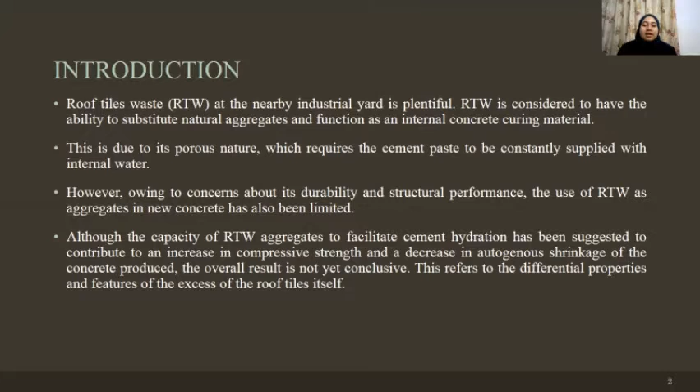Figure 1 shows the crushed roof tile waste that we will use in this analysis. Figure 2 shows sand and gravels, or aggregate, to make cement. Figure 3 shows the structure of cement and concrete.

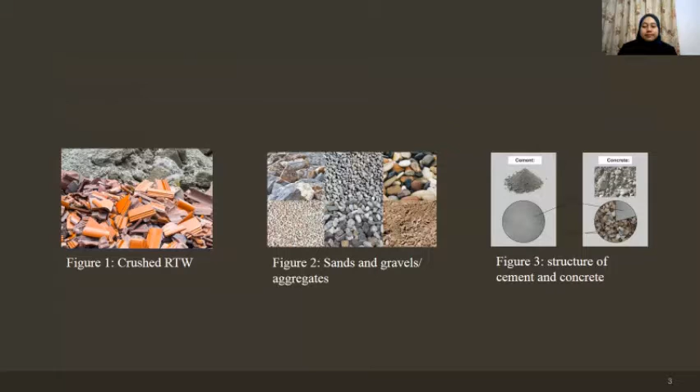Problem statement in this project: the toughness of the cement can be measured based on the replacement of the producing aggregates through waste ceramic. In this research, we need to study how tough the concrete produced is by using the roof tile waste in the analysis of the mechanical properties of green concrete.

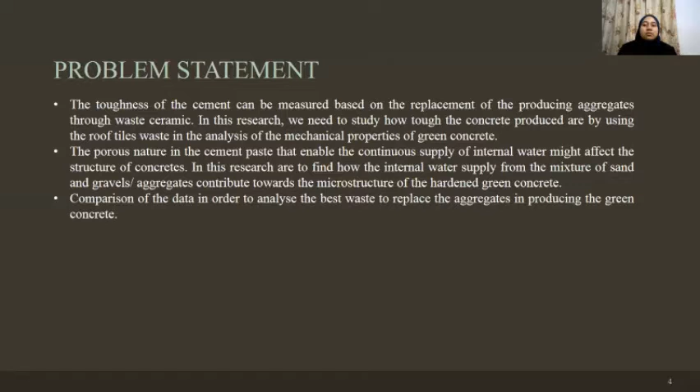The porous nature in the cement paste that enables the continuous supply of internal water might affect the structure of concretes. In this research, we aim to find how the internal water supply from the mixture of sand, gravels, or aggregate contribute towards the microstructure of the hardened green concrete. Lastly, comparison of the data in order to analyze the best waste to replace the aggregates in producing the green concrete.

Objectives in this project are: first, to analyze the characteristic and physical properties of the crushed recycled waste roof tiles as an aggregate for green concrete. Second, to analyze the mechanical and physical properties of green concrete produced using roof tile waste. Third, to characterize the microstructure of green concrete produced using roof tile waste.

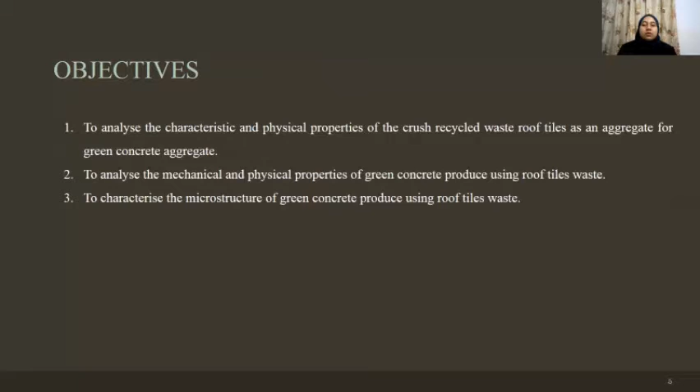The scopes in this project are: to study the characterization and physical properties of the recycled roof tile waste. Second, study the mechanical and physical properties of green concrete produced using roof tile waste. Third, study the microstructure of green concrete produced using roof tile waste.

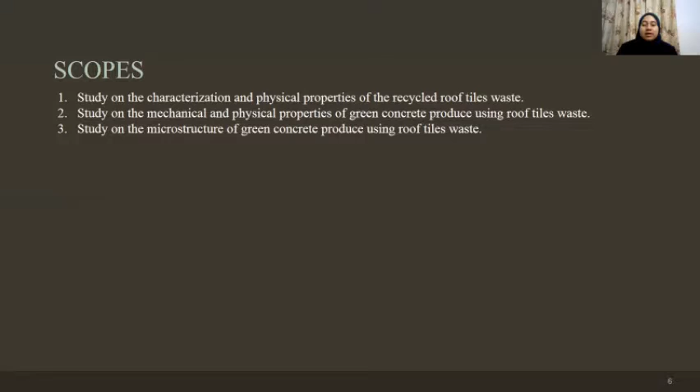Next will be the literature review in this project. I have found 3 articles that are directly related to the objectives in this project. The first article is: release of internal curing water from lightweight aggregates in cement paste investigated by neutron and X-ray tomography.

The parameters in this article are water to cement ratio, which is 0.25. Cement used was Portland cement, CEM 1 42.5, with density of 3,130 kg per meter cube. The Blaine fineness is 2,800 cm squared per gram.

A polycarboxylate-based superplasticizer, with solid content of 30% by mass, was added at a dosage of 0.72% by mass of cement. Deionized water was first boiled for about 15 seconds, then cooled down to ambient temperature before mixing. The mixing was performed in a vacuum mixer, with Twister evolution, for about 2 minutes.

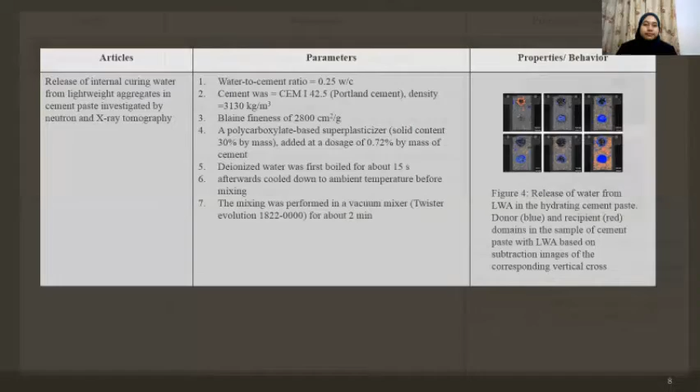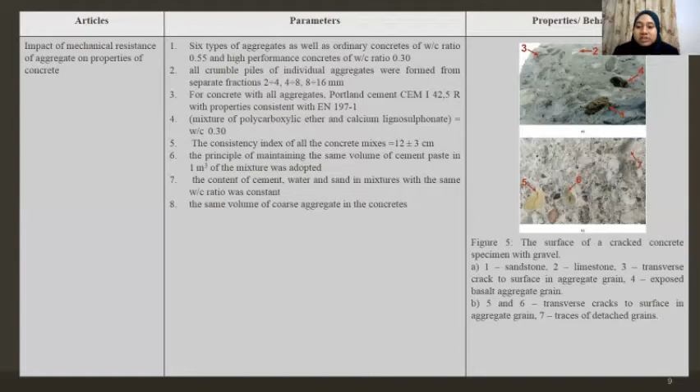In the last article, which is mechanical properties of recycled aggregate concrete under compression shear stress state, the parameters used in these articles are...

The Portland cement used is P.O 42.5, and river sand with a fineness modulus of 2.67, and water cement ratio of 0.43, combined with 3 kinds of RCA replacement rates, which are 0%, 50%, and 100%, and 5 sets of compressive stress ratio, which are 0, 0.2, 0.4, 0.6, and 0.8.

The water dosage consists of 2 parts. One part is normal water, calculated by the common concrete mix method, and the other part is named additional water, determined by the water absorption of recycled coarse aggregate.

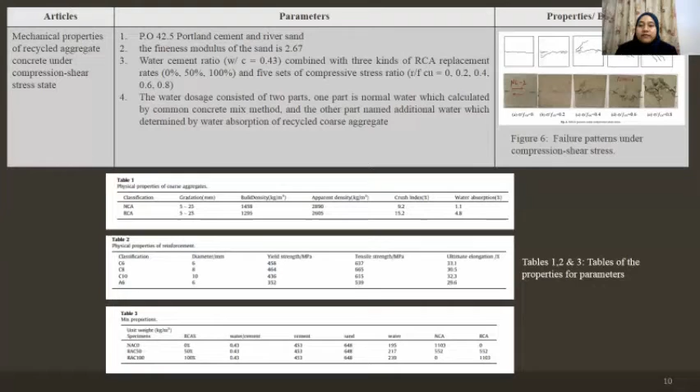Figure 6 shows the properties or behavior found in this article, which is failure patterns under the compression shear stress.

Next slide is methodology. In this project, there will be 5 phases in the analysis.

Phase 1 is raw materials and preparations. We will use roof tiles waste collections and crushing using a crusher machine. The roof tiles waste collection is from the Golden Clay Industries in Heights.

Phase 2 is crushing analysis. We will do a crushing analysis where we will make a sieve analysis according to standard to obtain the curve and fineness modulus, and we will also make an aggregate crushing value determination.

In phase 3, we will make physical properties, compositional and structural analysis. We will do a specific gravity test, water absorption test, abrasion resistance, composition analysis via XRF analysis, and crystalline phase analysis using XRD.

In phase 4, we will do a slump test of green concrete mixture to analyze the workability of fresh mixing concrete, and to utilize coarse recycled roof tile waste aggregates and fine recycled roof tile waste aggregates with different mixture ratios.

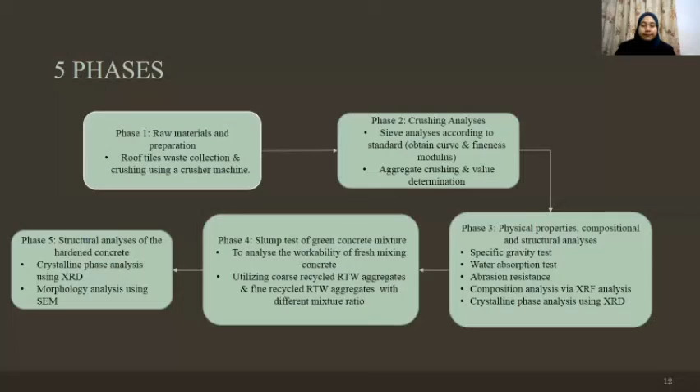Figure 7 shows the raw material that we will use, which is supplied from the Golden Clay Industries Sdn Bhd.

To prepare the concrete, we refer to the British standard, BS standard, where we use the suggested method of ratio design, which is the mix design of concrete, compliance to the DOE method, BS standard.

Application of green concrete. Figure 8 shows the green concrete that applied at the manholes.

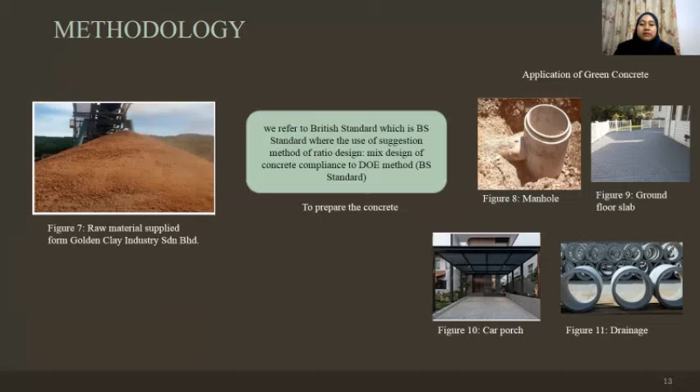Figure 9 shows the green concrete applied at the ground floor slab. Figure 10 shows the green concrete applied at the carport. And figure 11 shows the green concrete applied at the drainage.

In the last slide, the expected results will be to obtain the data of the gradation and the fineness modulus of the crushed roof tile waste from the sieve analysis.

Second, the level of crushing roof tile waste aggregates value determined. Third, obtain the specific data of the roof tile waste aggregate after doing the gravity test, water absorption test, and abrasion resistance test. Fourth, obtain the data of the coarse and fine aggregates at different green concrete mixture ratios.